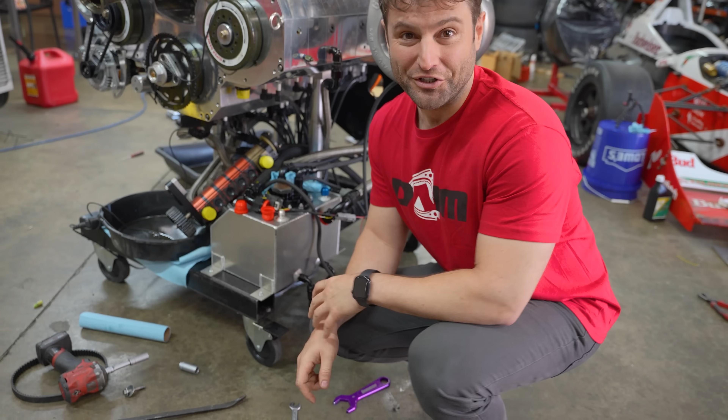There is no time wasted. We cleaned up all the oil off the floor and we are focused on turning this thing into a vehicle engine, not just an engine on a stand, but we need to make tons of power out of it and get it ready for putting it into something special.

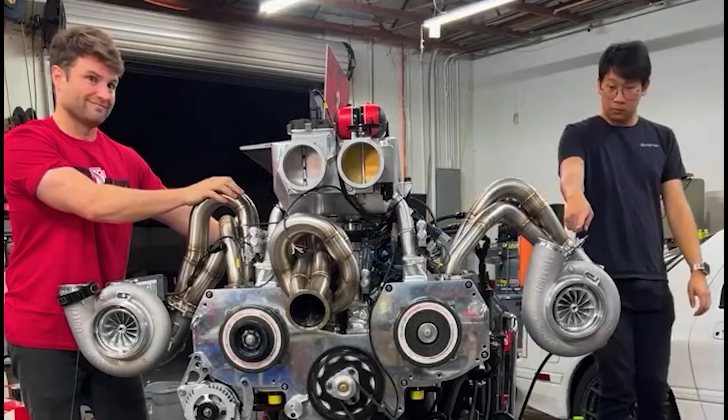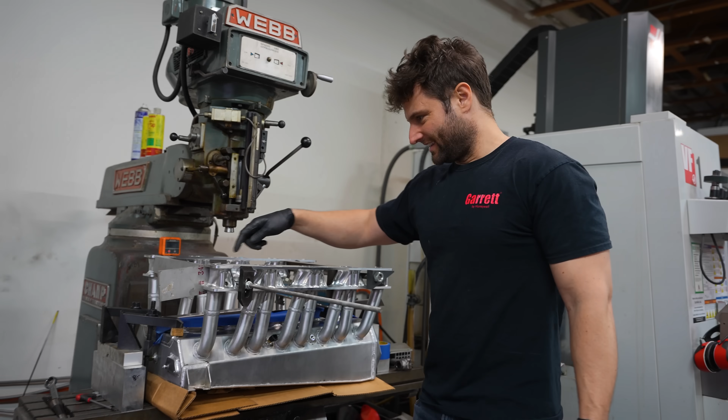If that little backfire taught us anything, it's that at over 35 PSI, we found all the leaks. It was perfect because it actually had a little bit of smoke and shot smoke out of all the areas that were leaking. So what we need to do is flatten the intake manifold. This is a banana boat. It curves like that. And I'm gonna guess it's over 35 thousandths based on what I was looking at.

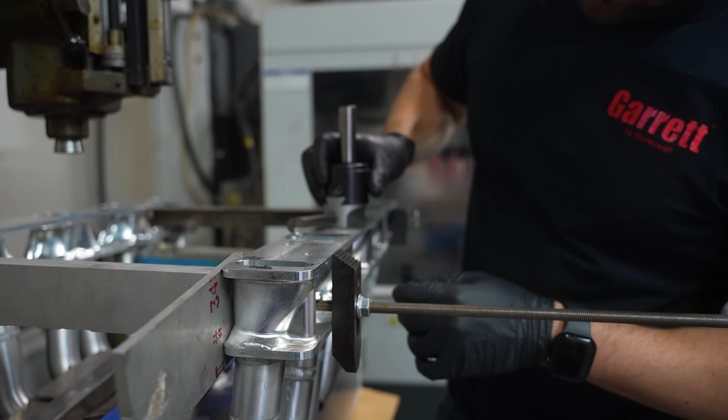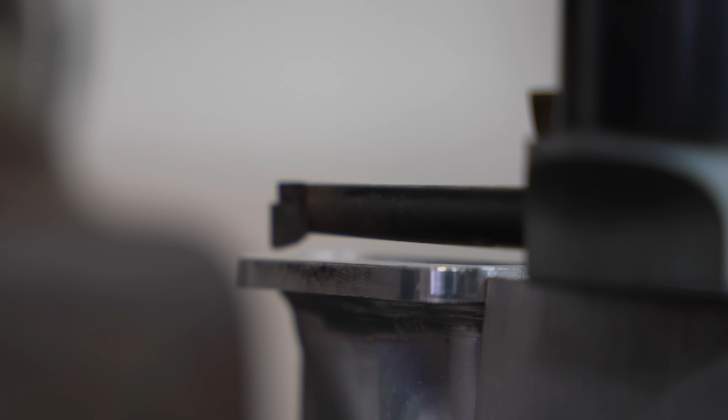I'm gonna be using this as a fly cutter. And the problem is it's not tall enough to go directly over it like you see on all those head machining videos. So what I'm gonna do is I made the throw long enough that I'm gonna have this basically go from here and spin, whop, whop, whop. So we're gonna have this rainbow shape. That was touching in the very middle. I haven't changed heights. That shows you how much this thing is just warped.

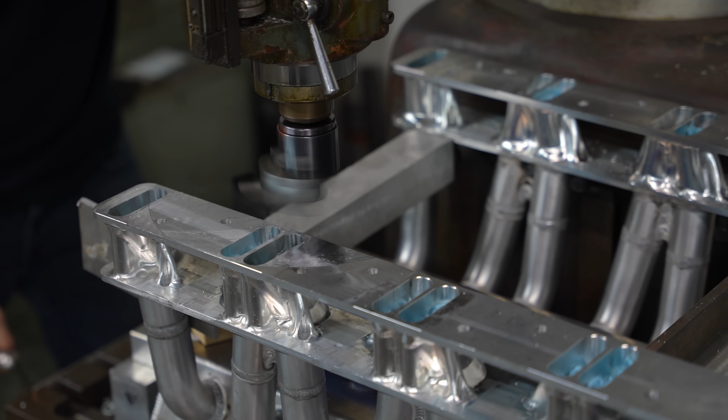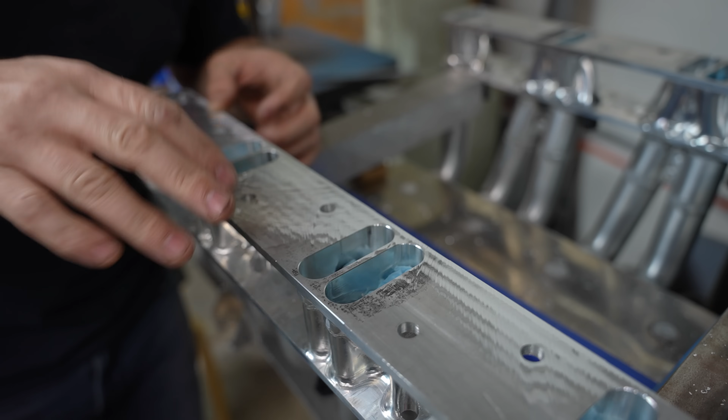Being that's the first time I've ever done something like that, you can see the vibration making marks, creates these little waves. You can actually probably see it best here. Really wild watching it. Once it hits, it bounces. That said, this is easy to treat. It looks worse than it is, but we now have a much flatter manifold. So I'm gonna go ahead and do this side.

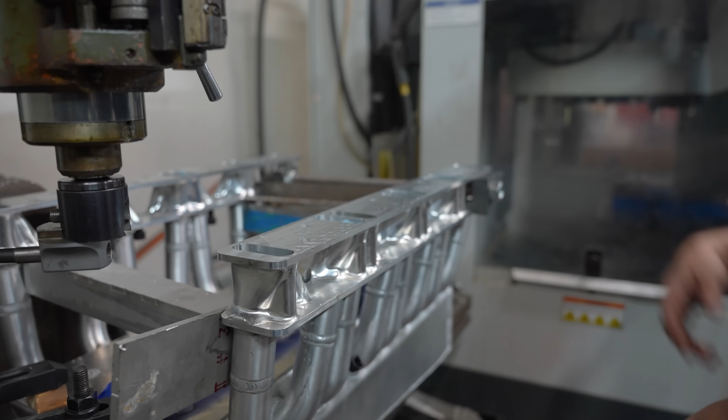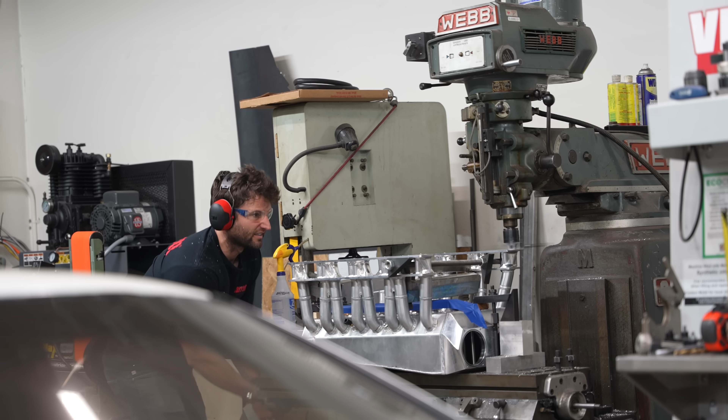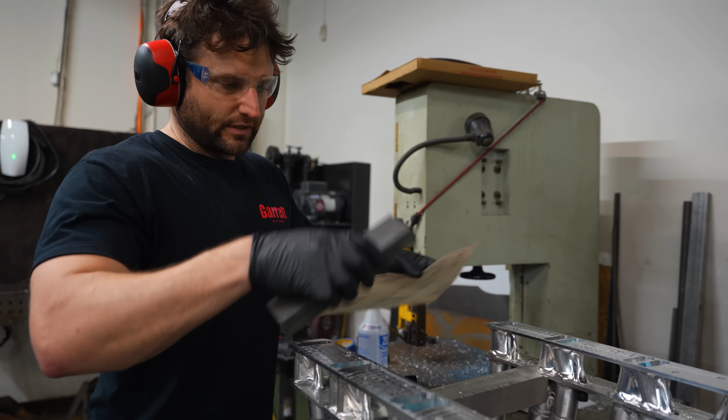So with that step done very successfully, in theory we could just throw the gasket on and call it, but that's obviously not how we operate. So I'm gonna take a stone, since the whole thing's already pretty much flat, I don't have to worry about bowing it myself.

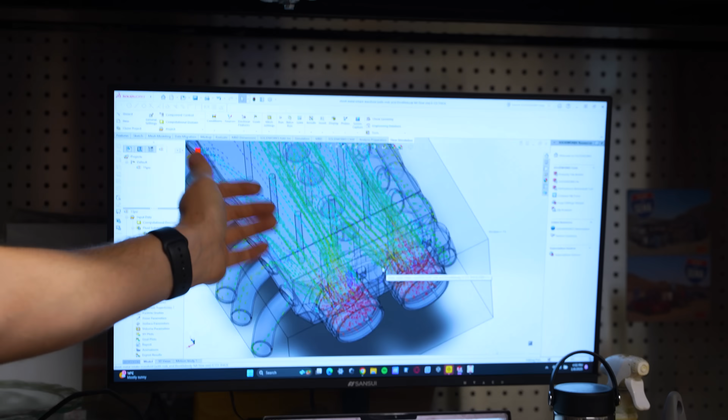We have a bit of an issue. Our intake manifold is trash. We had to put something on the board, and thanks to Tyson, the guy that invented the 12 rotor, was like, hey, I did something just like that years ago. And when you start flowing air, as you can see Ethan's simulating airflow with it naturally aspirated, airflow across the surface like this can end up creating Venturi effect and actually vacuuming out certain ports.

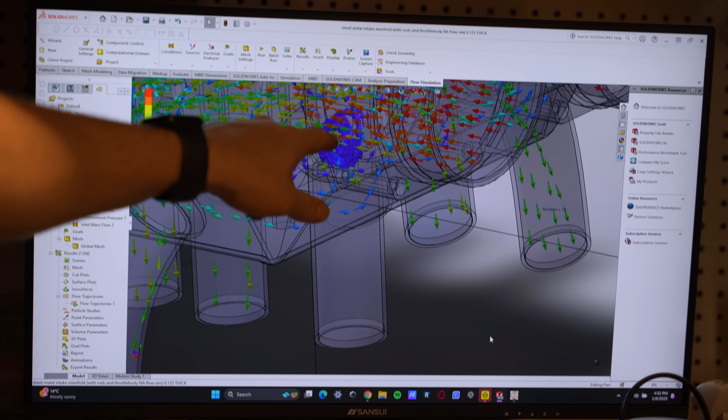And so when you look at this, these ports are getting a lot of nice little arrows. Not so much as you'd expect. This area is neglected, he gets nothing. Absolutely nothing. There's a tornado going on in there, but he gets nothing, and that makes sense. These are going right past the top of it. This is sitting in timeout for a moment. It's done an incredible job, but we were waiting for this.

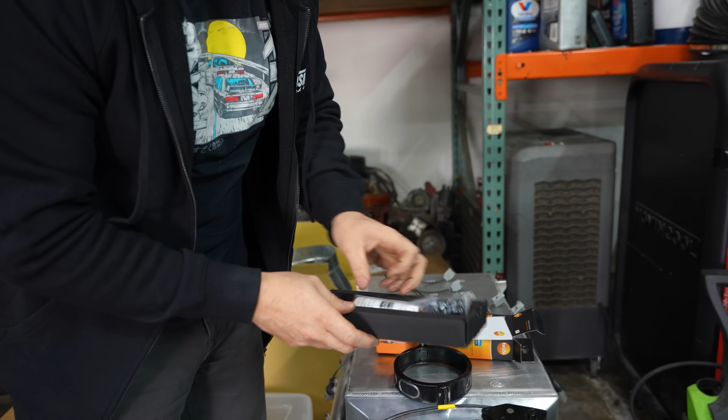This thing is basically a mass airflow sensor on a stick. What we're looking for is at least the consistency to test airflow. So the way this little thing works is that there's a temp sensor, essentially a little element right there. It can estimate how much air is flowing past it by how much it cools back down. So it knows the outside air temperature, or whatever air, these both have to be in the same channel. So if it's 70 degrees going past this one, and it's 80 degrees going past this one, it can do all the calculation and figure that out.

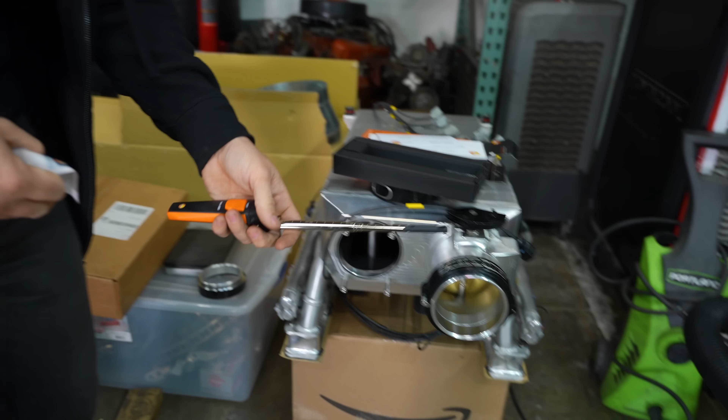What we're gonna do is buy 2 leaf blowers, stick them here and here, and then measure each port individually and see the airflow between them. And that should really tell us some fascinating information. I guarantee this one is going to be misbehaving.

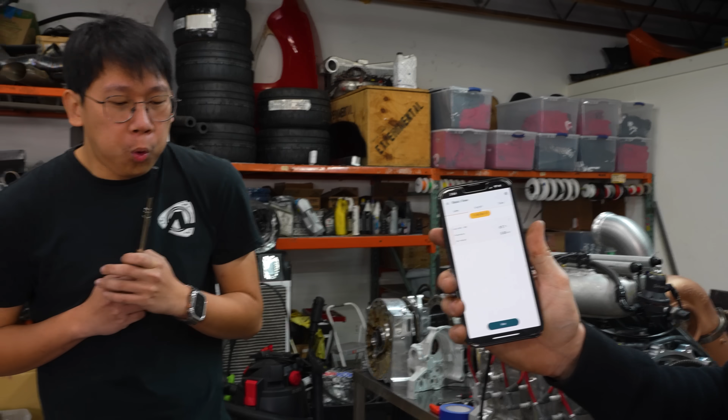I'm gonna do a blowing contest, and we're gonna see who can move the most air. Okay, Ethan's up first. 25, ooh. Jeez, what the heck? He was efficient. Okay, I'm gonna sandbag this.

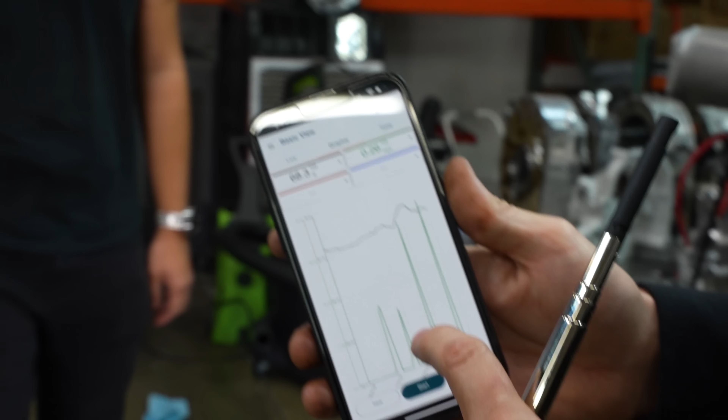24. 56. Oh. Yeah, I'm full of hot air. All right, Joel, you hit it. Oh, you spit on me. Yeah, you spit on it. 62. Oh. Yeah. Ethan, Rob, me, Joel. Professional blower at your services. Yeah. That's going to be super useful.

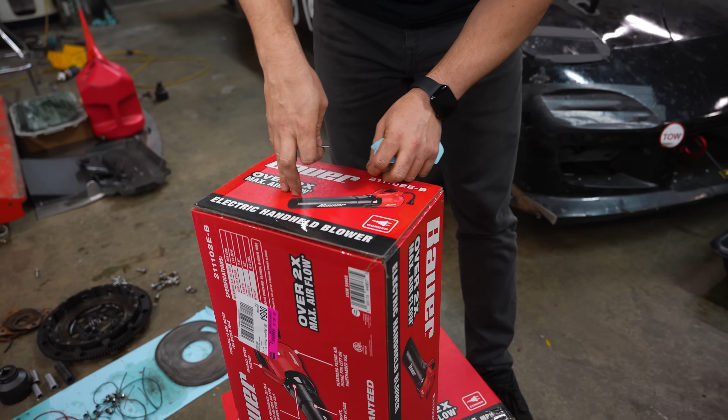We are going to simulate moving a lot of air. Now, this isn't going to simulate the pressure. It's kind of tough because airflow is not air volume, but there's some correlation. I don't give a shit about the speed, but the cubic feet per minute, we could probably do some rough math from that. And we are going to put these into each of the intakes and then watch how much each of those runners do or do not work. See that jet turbine sitting right in there? Okay.

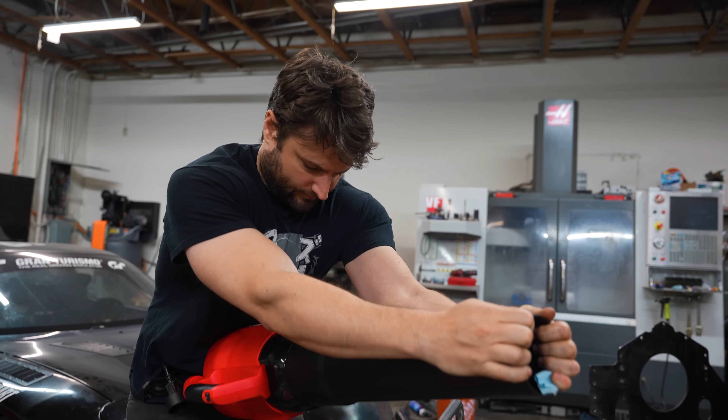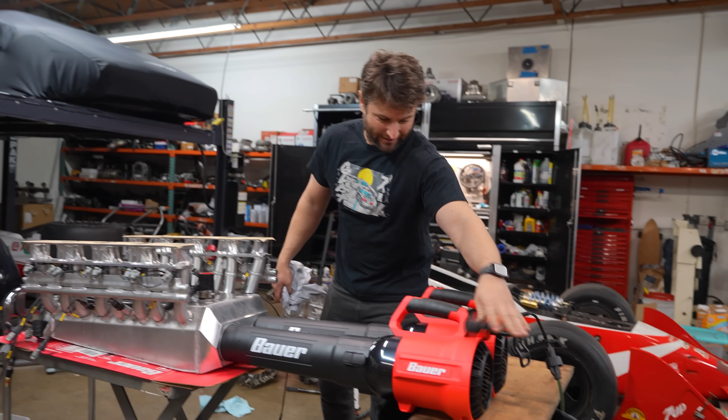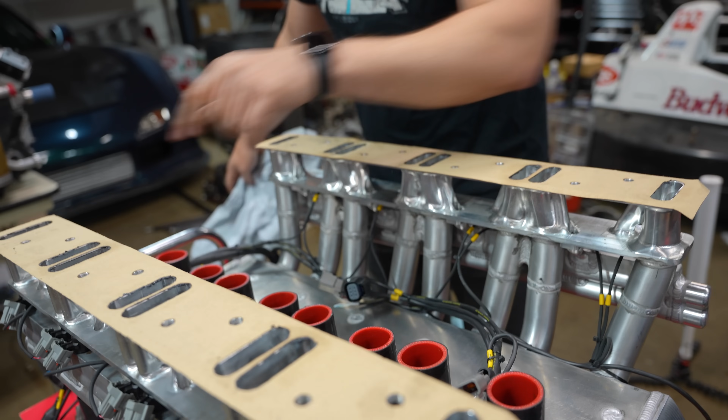The fixture's perfect. Things are starting to come together, and I am very happy that we followed through on this. We only have one powered up because this is annoying, but we're gonna go ahead and just turn it on and see. That's just one side. I'm really impressed that it feels physically the same across here. This feels a little bit weaker. My initial guess is that this is the strongest set, next strongest, next, weak, almost nothing, and then absolutely nothing on any of these three.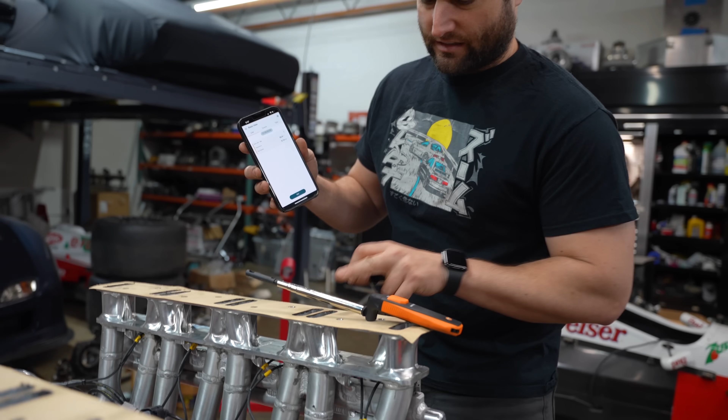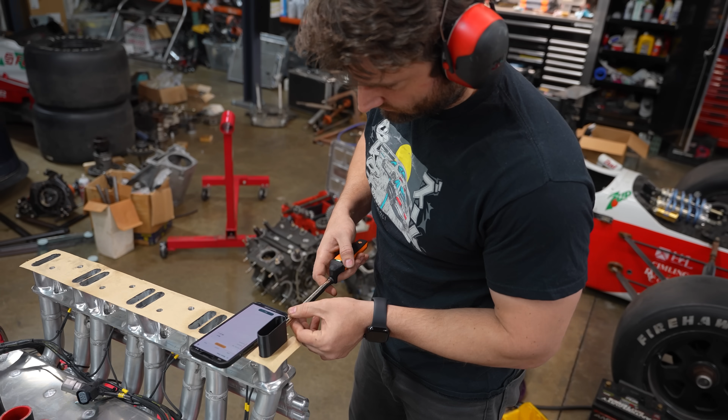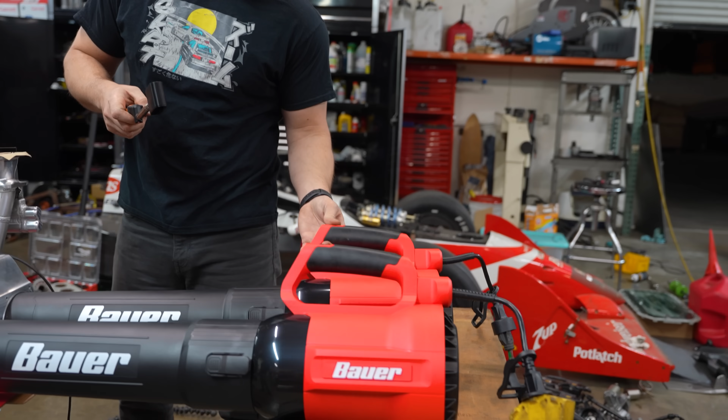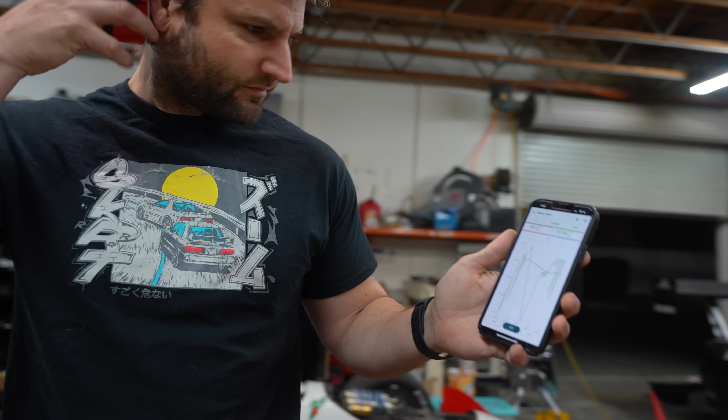We're just gonna stick with miles per hour because same size for all of these, and we're gonna do 5 seconds, 5 seconds, 5 seconds, and then see what it tells us. Now that they're on two different breakers, that's too high of a range. Aired out, right? So first one, second one, and then third one, it aired out. We're gonna set them both to medium first. Look at that. This one's low, this one's not much better. This one starts to climb up. This one is climbing, and then the last four are all even.

That was a peak of 62 miles per hour. So we're gonna see side to side how far off that is. But sadly, because this thing can't read over 70 miles an hour, we can't turn it full speed. But we do know it's not even. And the good news is we can weld shit into here and then at full speed, see if they all kind of air out at the same time.

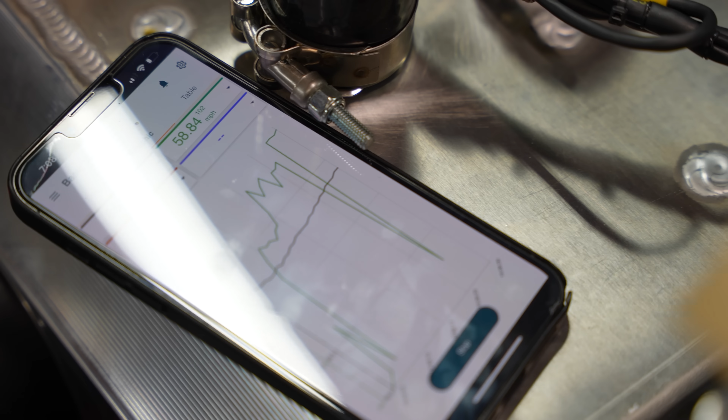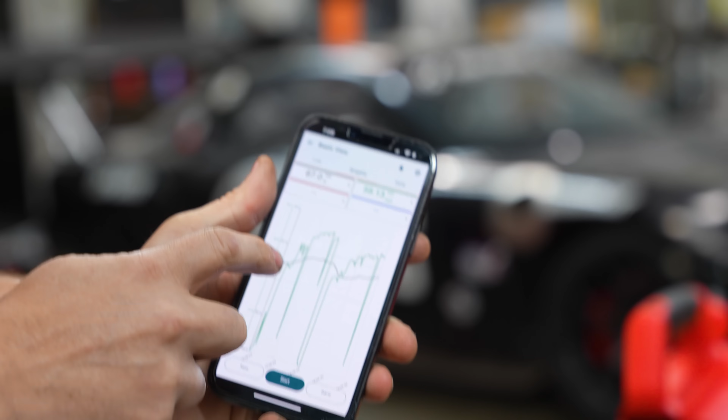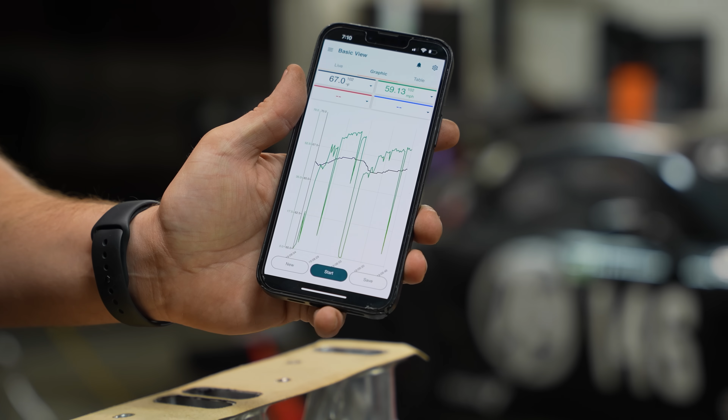So we have some really interesting data. The front runners on both of them are virtually identical. There is a distinct difference side to side on the rear runners. So the very rear runner is getting slightly less than the one before it, but you can see that all the runners on this side are consistently, but slightly less. So we do know that we are going to naturally have a problem here.

Now this is rotor 1, 2, 3, 4 type of thing. These two are wired together. So I have a third of difference of airflow. I'm simplifying all this. That means that if I give the same amount of fuel to both of these, which I have to right now, one of them will either be 30% rich or 30% lean, or 15 one way and 15 the other way.

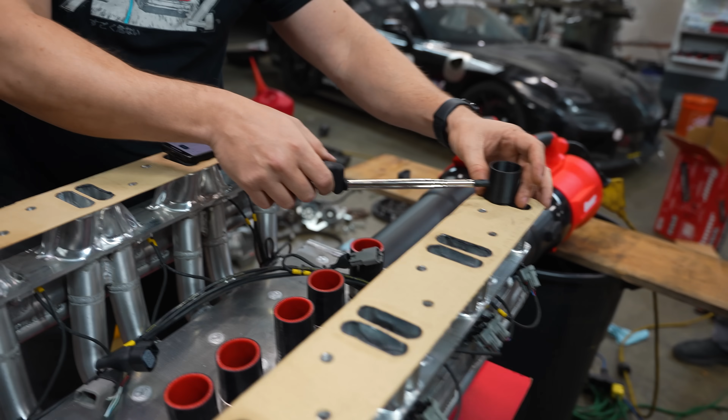So Ethan made this little chingadera. All the runners on these are the same diameter, so it's kind of the same thing, different shapes. We're gonna look for the ratio amongst these, and we'll kind of look at these compared to these, but if it's way off, I would be careful.

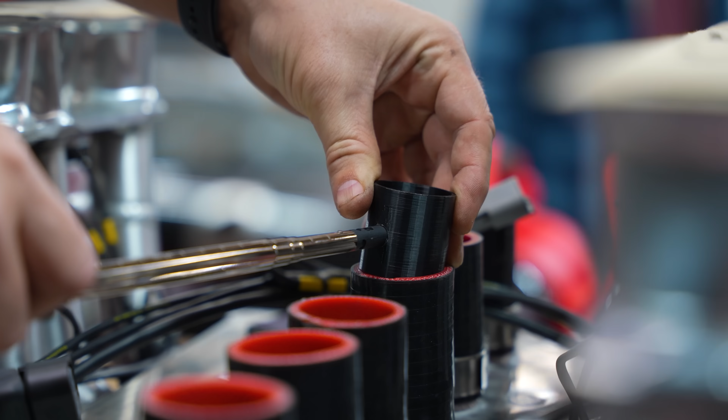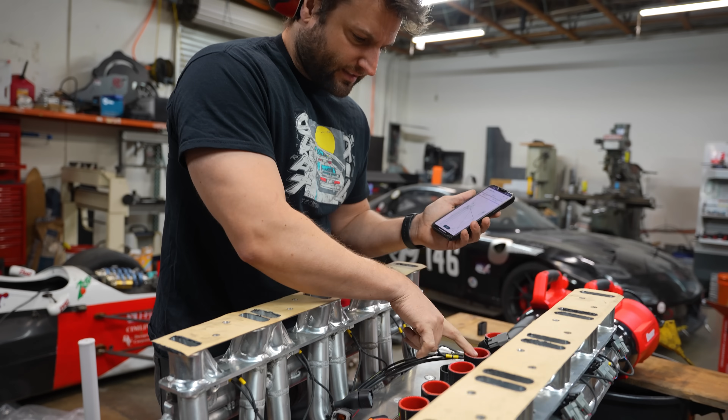It doesn't flow as much as these, and it definitely doesn't flow as much as these right here, but they do the same thing. The front one's the worst, step up, and then all the same. That's really kind of how I'm thinking this. Worst, step up, almost fully, all the same. Now it's time to start welding little pieces to it and seeing how it changes the airflow.

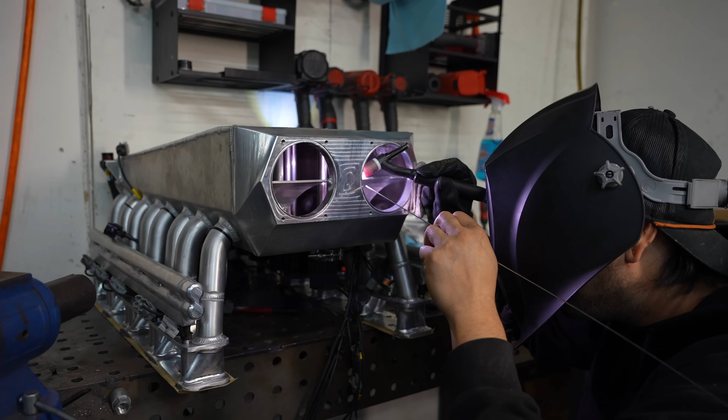We are all super interested in seeing how the real world version of this turns into results. If they're pretty close, then I'll be able to say, okay, these two are plus 2%, these two are minus 2%, or something along those lines. So something very fascinating about this that is almost coincidental.

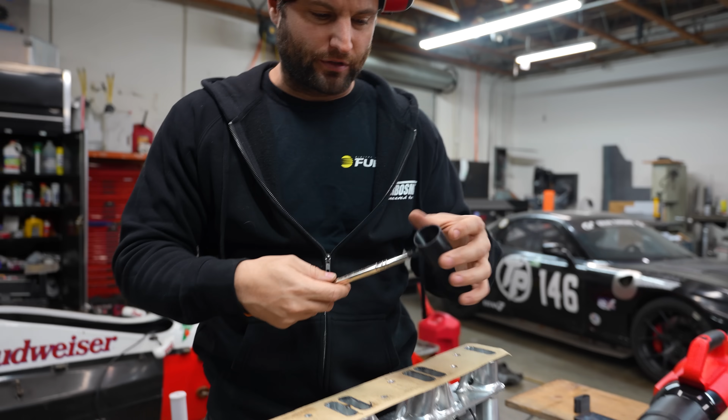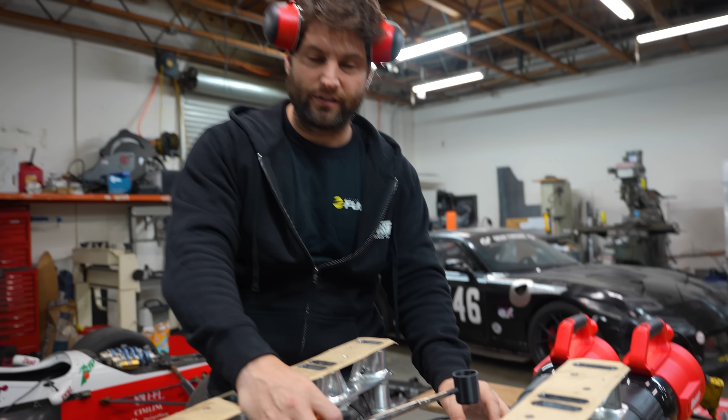This is 1.5 inches in diameter. All the runners are this size. And these are actually technically that size too. They just split out, get wider. But this surface area with this flow ends up being where if we read, we'll say 60 miles an hour of air coming out of this, a lot of constraints, a lot of overestimations, but that actually ends up meaning about 55 cubic feet of air per minute.

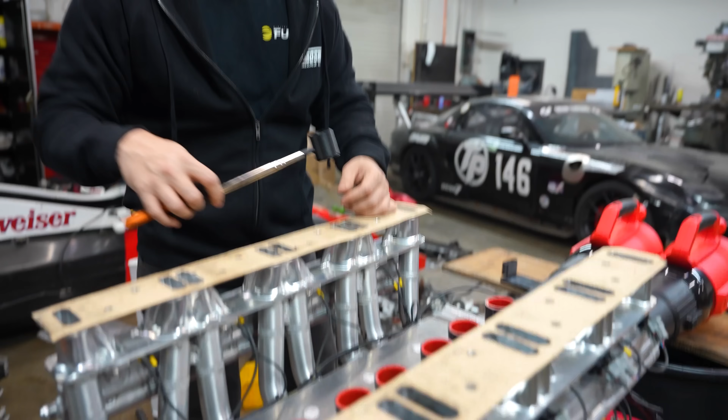So it directly relates to airflow, to air volume. If I say this one has 20% less speed, because there's not really a pressure difference going on here, that 20% less speed actually means 20% less flow. And what was really neat is last night I went through and did all the math based on the average speed of all of these, and it came up to under the number rated on these.

So these both rated to whatever they said, 800 CFM each on high. But when I added it all up, it ended up being 1200, which must be both of them on low. So really, really good to see the math all adding up with good approximations. Let's see what happens.

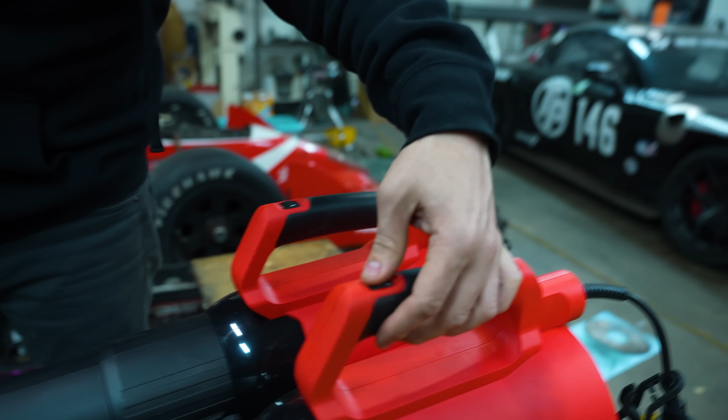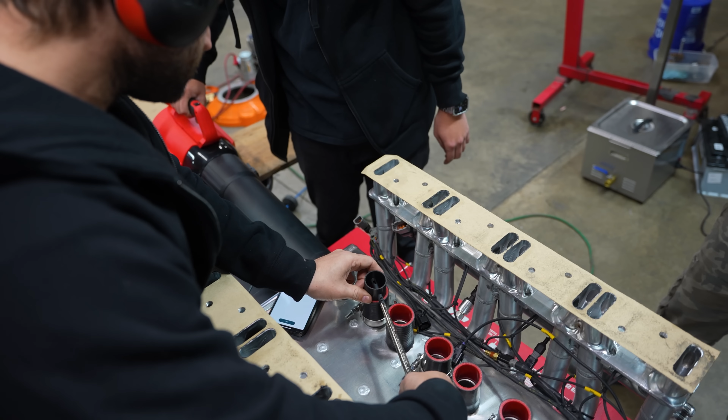Our simple test has become more complex just because the cart moves, these move, everything's moving. It's working, but you can tell one thing that's very interesting is that it's showing you that there's more resistance in the manifold because of the plates, so it's actually physically pushing. We're trading off flow for consistent flow for pressure.

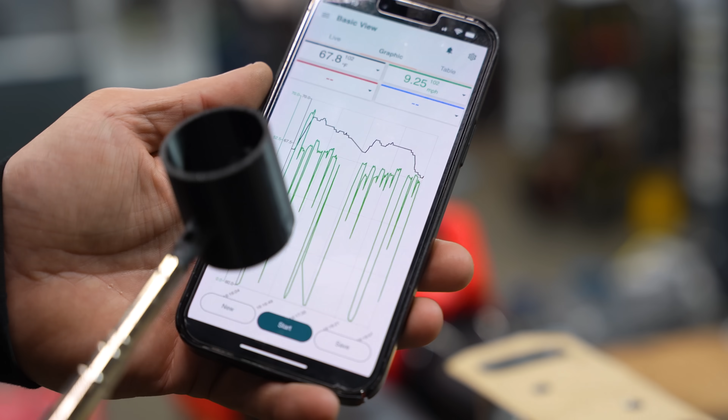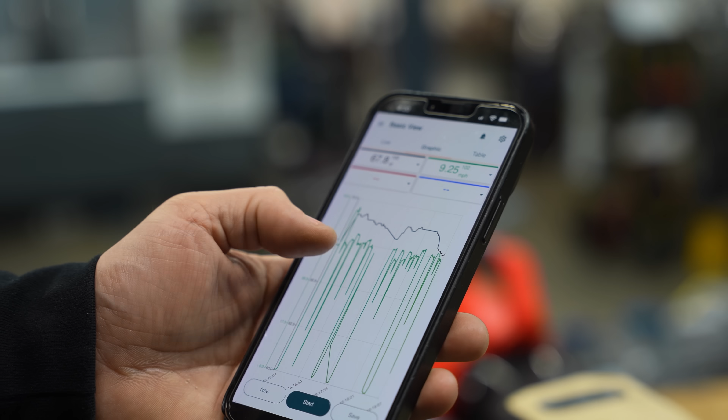There's way too much air going to this one. It's way higher than all the other ones. I can feel it when I'm over it, but all the other ones are pretty even, and you can see pretty even here, but it's fascinating. High, low, then it kind of levels off in the very back one.

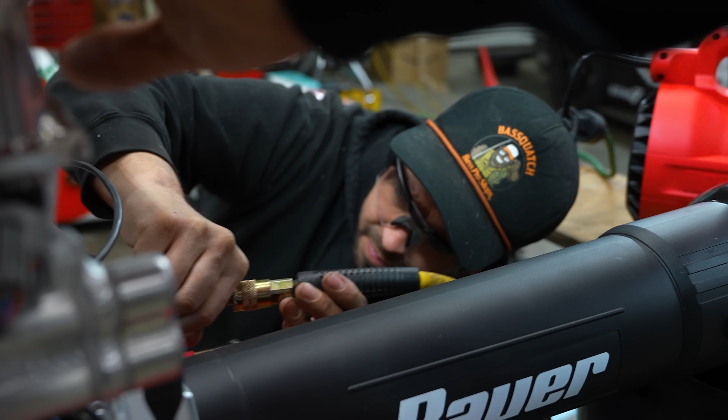Rob just grinded the inner plate, and it was a test, and he said no, and that was the right answer. And then I said, well, let's throw one of these back on and close all these off, so it's like a positive pressure that has to shoot the air out. And sure enough, we made sure he was wearing glasses for that because it was just shooting all of the grind onto him, which sounds oddly sexual.

We just put our hands over these, and they feel very even. When I did it the first time, this was very clear, I didn't need a sensor to tell me. So we're gonna go ahead and run it again, compare. Now, one thing I just realized, those things are technically creating more back pressure, and we could tell that because that's pushing the things apart. But more than that, that directly resulted in all of these being, on average, less air velocity.

That's one way that you could measure if your intake manifold's restrictive or not: throwing this much air in, if they start slowing down, adding them all together, slowing down on average, that means that you're creating more restriction. But it was so subtle, and we need to do it for the sake of what we're doing. Let's see what numbers we get now.

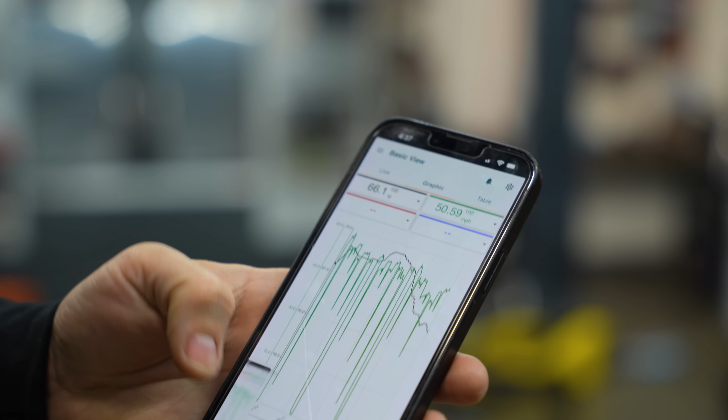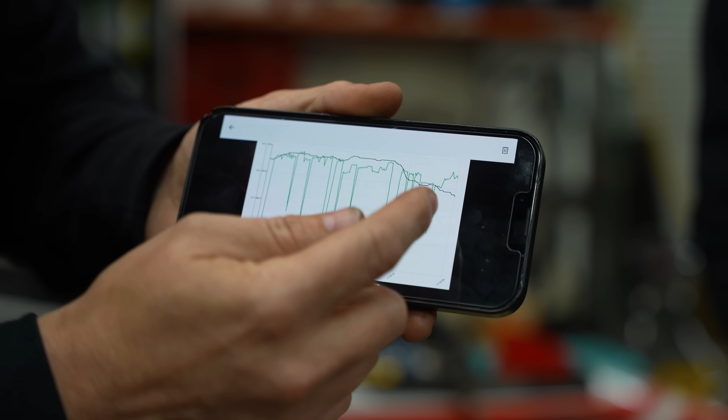That's night and day from the original setup till now. They are all even, essentially even. It gets funny on this row in that there's high, lower, higher. And the good news is the very front and the rear runners look like they average out. And the middle ones are very close too. And then this is on the rows here, and making those little changes changed these a little bit as well.

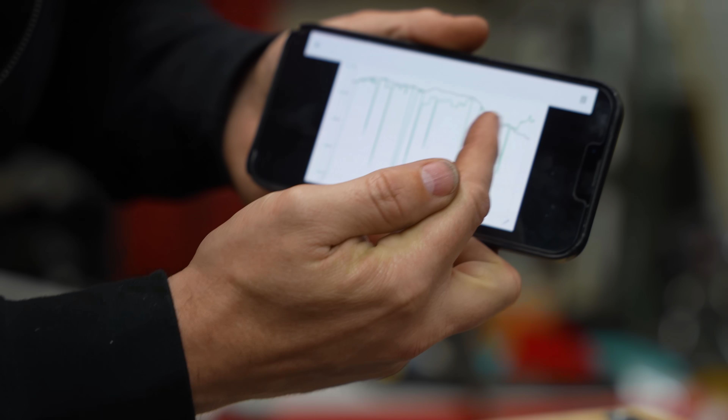But we have another thing where the front rotor and the rear rotor are getting the same amount of air, and the middle one has one runner getting high air, one runner getting low air. So we're in business in that one rotor is not going to be lean and one rich. This is drastically different. Let's compare that.

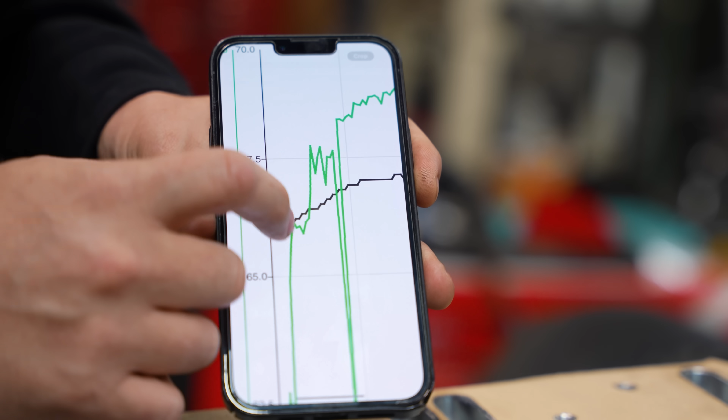That was the front runner right there. Second runner, what's that difference? That's like 40 to 62. That's how much of a difference before putting those plates in. And now they're all so much more even. What a massive difference on the flow of this thing.

Now, what I did notice is all the numbers are slightly lower than they were before, and you can kind of roll these and mess that up a little bit, but I'm not surprised that the average number is slightly lower because there's a little bit more restriction. But even power means this manifold, we'll just clean it up just a little bit, is ready for the dyno.